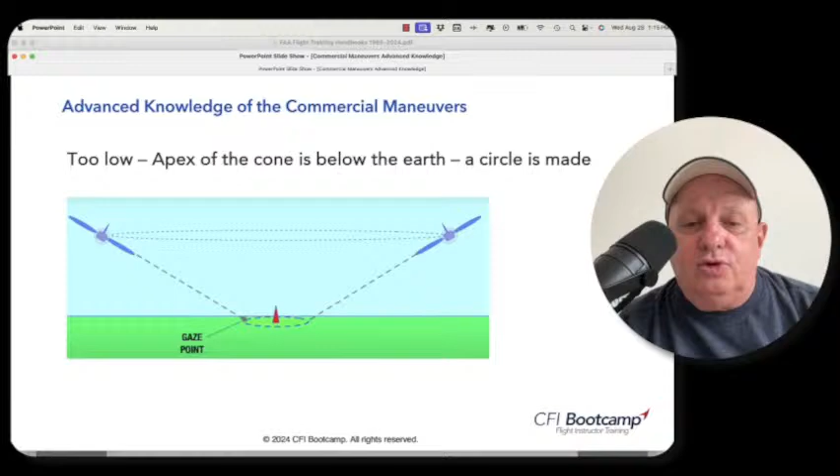And if you're too high, then the apex of the cone goes the other way, and your gaze point is going to be on the other side of the pylon. In one of the directions, it's going to look like the wing is moving forward across the pylon, or around the pylon in a circle, and in the other one, it'll look like the wing is dragging behind it. It'll look like it's making a circle behind.

Now, you can do this for fun. I recommend that you do it. Go out, and you know what the pivotal altitude is. It's the ground speed squared over 11.3, in knots. We can talk all day about why that's true. I have the mathematics done for that, but that's a separate conversation. I've already done a power hour on that, by the way.

The idea here is that for this altitude, if you go out and you look at your AGL height, whatever that is, and you add the pivotal altitude height to it plus a little bit, you'll be above pivotal altitude. And when you start a turn, you pick a point, drop your line of sight, pick a point on the ground, and what's going to happen is as you make that turn, it's going to look like the wing or your line of sight is starting to move backwards across the ground in a circle around that point. It will not stay on the point, but it will make it look like the ground is moving, or your wing is moving backwards across the ground.

And if you continue to descend, all of a sudden it will stop. That's where the pivotal altitude is. And if you go below pivotal altitude, it'll look like the wing is going forward across the ground, not backwards anymore. And that's when you're too low. So in those cases, you would make the corrections, which if you're too high, you'd of course pitch down, and if you're too low, then you'd pitch up.

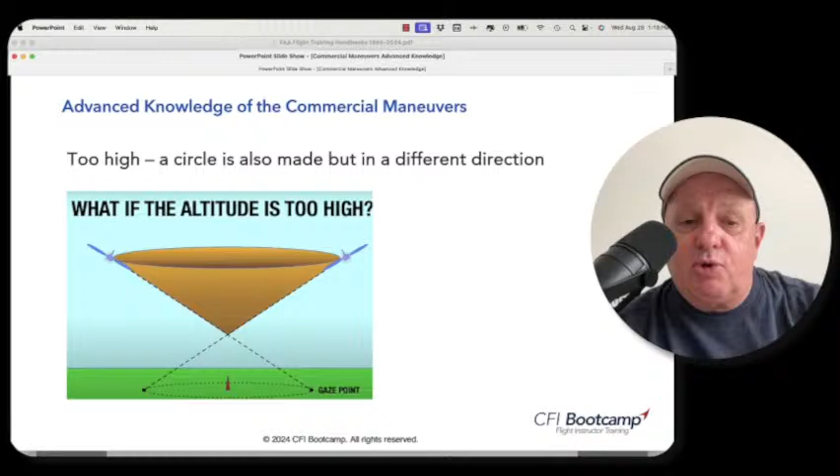If you could envision this, airplane 1 is right where this airplane is, and airplane 2 is below it. It would still be at the correct pivotal altitude if it were sliding down this cone and making a new radius. If it keeps the same radius, then it's too high, or too low.

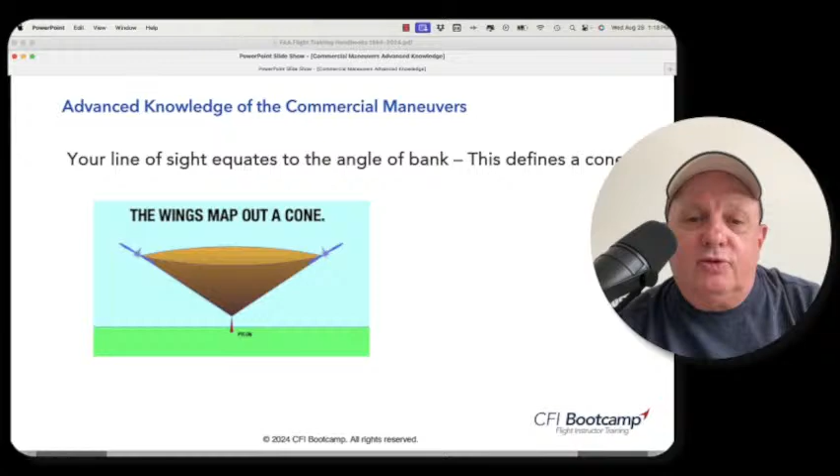But if you slide down this cone, anywhere on the cone, and go around it at the right speed, the apex of the cone will be on the ground, right? So it will pivot again. As you go slower, you have to lower the pivotal altitude to remain on that cone. That's kind of an important concept.

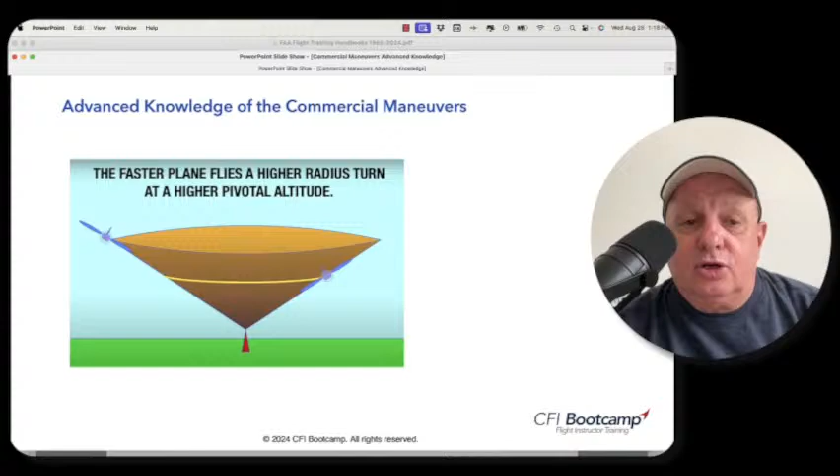So there's the example of that. The first airplane is flying faster, so it's got a higher radius at the top of the cone. If there were a faster airplane yet, it would make a bigger radius, and the cone would just be extended. And there's a slower one. So that's how it works.

Here's the pivotal altitude formula: it's ground speed squared over 11.3. It is only necessary, however, to calculate the highest pivotal altitude - you don't need the lowest. Why not the lowest too?

People will say I teach it wrong. If you hear instructors who fly on opinion, who don't really consult the handbooks, they just fly on what they were told, and then have epiphanies about things - I have a unique way of explaining this or that - a lot of it's wrong. It's just dead wrong. Not all the time, but in many times.

One instructor will say you will fly from the highest pivotal altitude you calculate, which is going to be the ground speed - your true speed plus the tailwind you'll have when downwind. But you will not need to fly all the way down to where your true speed and the headwind make the speed slowest. That altitude you will not get to. You didn't know that, did you? Okay, let me take some of those.

So I just finished 3 miles out in the hot sun here in Miami Beach, and I go down to the beach almost every day for exercise.

Okay, so look, here's the pivotal altitude example. 90 knots is the true speed, and we have a 20-knot wind. So on the downwind, we're going to have 110 knots ground speed, which works out to a pivotal altitude of 1,071 feet. We're definitely going to have to start there.

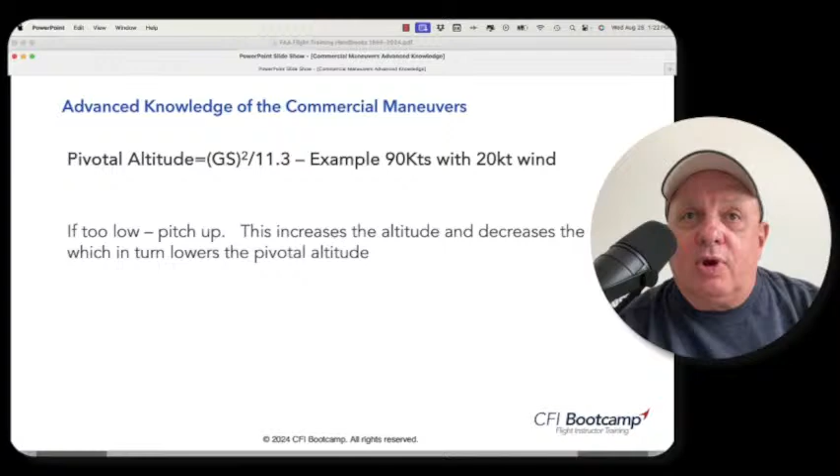Okay, let's move down the list. If you're too low, you pitch up. That's going to increase the altitude, which is what you want because you're too low. But the indicated airspeed is going to go down, which is going to lower pivotal altitude. So the doubling effect works on that. You're not going to have to fly all the way down to where you'd have a 70 knot groundspeed because you're going to let the airspeed vary. That's why. It's referred to as a doubling effect, and it's also the reason that only small changes in altitude need to be made.

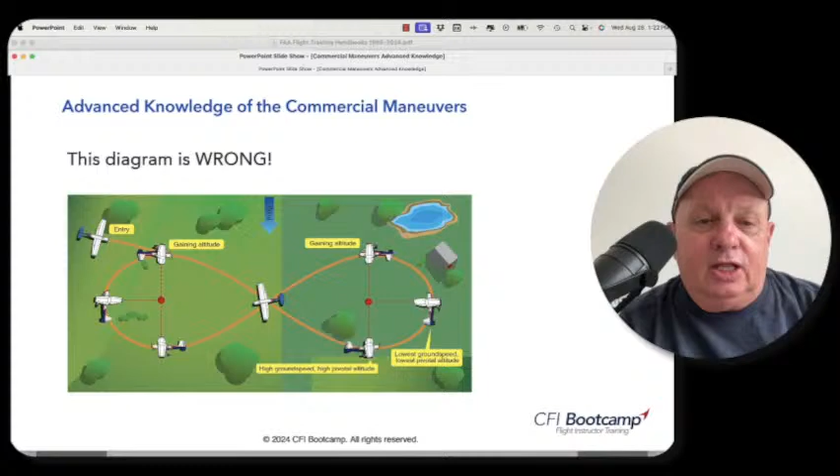All right, so this is a diagram for eights on pylons, and it's wrong, right? Dead wrong. It's not right. It looks kind of like this, but let's look at what's wrong with it. The first thing is the angles between the pylons are too shallow. This is about a 20, maybe 25-degree angle between pylons. That's too shallow. It'd take you a long time to get around the pylons, and the time in between would be very long. That angle needs to be about 45 degrees, somewhere around that.

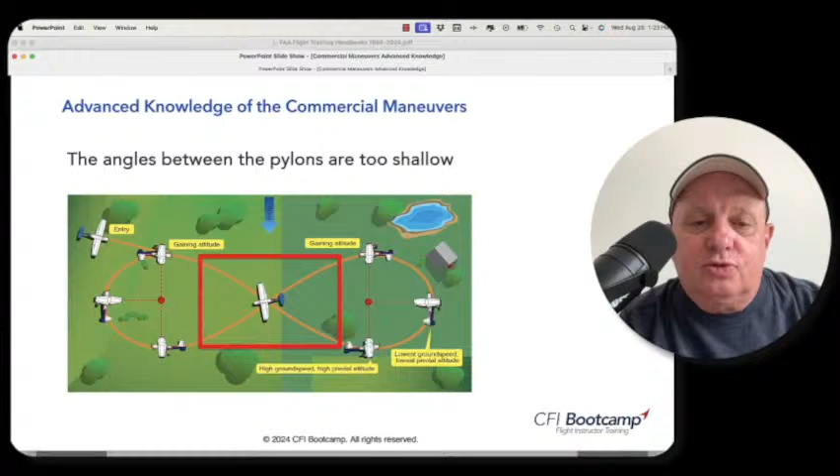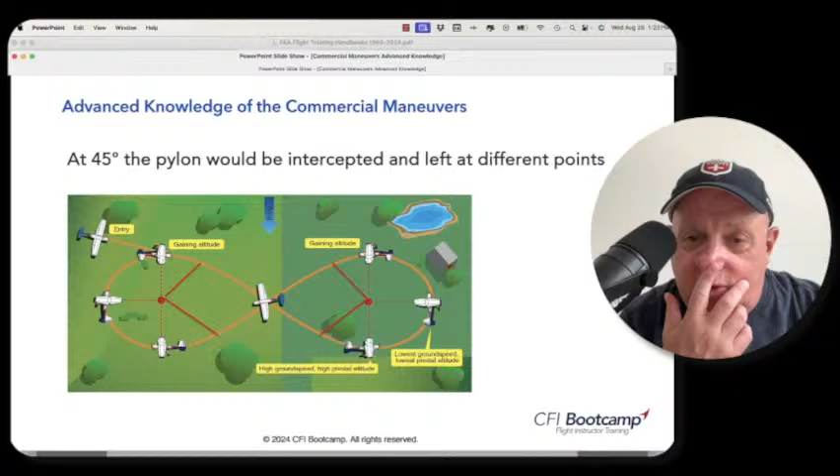The pylons need to be spaced a lot closer than that. In addition, here's the other thing that happens. If you're doing this maneuver right, you're going to start being on the pylon. The wing, line of sight, will be on the pylon right where my new red line is, not there. That's too late. And you're going to leave the pylon about here. That's a big bunch of space going around this pylon that's not being counted for. So if you had to go from here and then all the way down to here, it says 3 to 5 seconds. I think that'd take like 55 seconds. It'd take too long. So that's not right. So this, where I have the red lines, is where it's correct.

So there's that. Also, the pattern across the ground is not correct. It shows a constant radius, pretty much. Maybe it does, maybe I'm a little wrong there. But actually, it's not going to be a constant radius because you cannot correct for wind during eights on pylons, except in between the pylons. While you're turning, you can't correct for wind. If you do, you're not doing eights on pylons anymore. You're doing turns around a point.

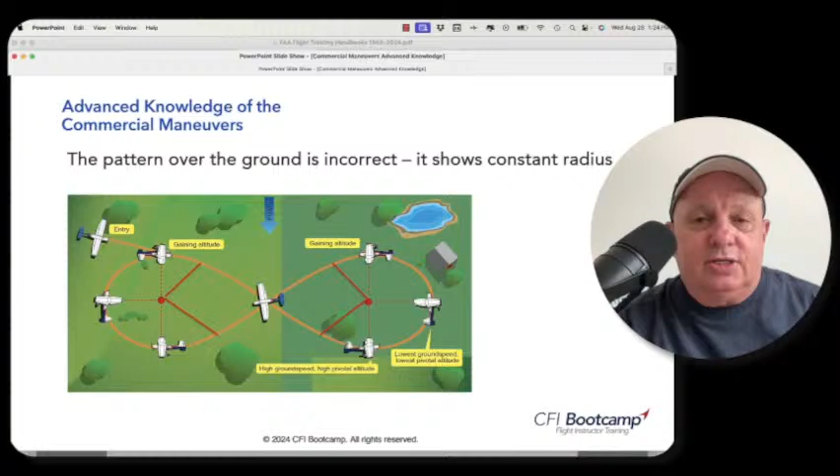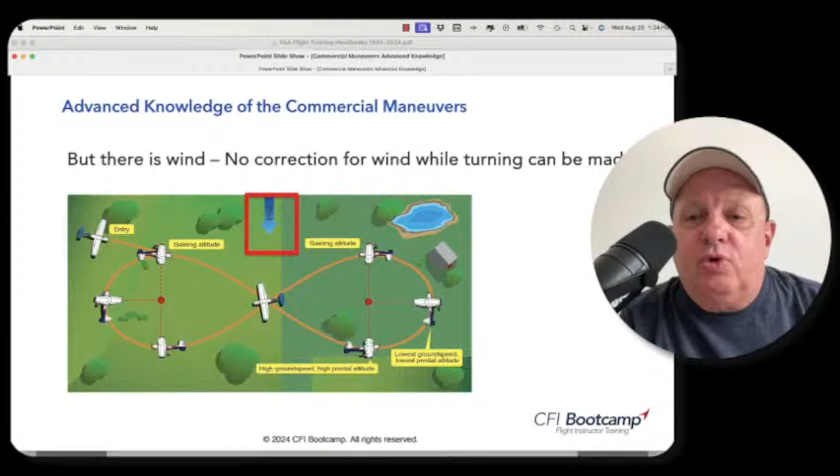And then, of course, you should know that your line of sight is going to change. So if you try to crab by banking more to keep the radius the same, your line of sight is going to change. So you're not going to be able to keep the pivotal point pivoting anyway. So you let it drift. That's the whole idea. In this case, they have wind in this diagram, which is why I say it's mostly incorrect. There's no correction for wind made while turning, right? We don't make any corrections for that. If you try to correct for wind, your line of sight will change.

So the real ground track looks something like this. I wrote this after I made these cartoon images, and I found an image from the old flying handbook that says as much. There's some things missing here that we don't talk about anymore, so I'm going to bring those out to you as we go. The ground track's going to look more like that, because if you look at this airplane, it's starting out in the middle. It's going to continue to drift with the wind until we get right where this airplane is, but it would be over where the red line is — farther, right? Abeam, when you're abeam the pylon. I'll show it to you a little bit better here in a second.

That's where you're going to be farthest away from the pylon. And then the other thing not shown is that on the upwind, directly into the wind, you're farthest away from the pylon because you're not drifting anymore, that drift is stopped. Because you're not taking into account for wind, normally you would have a very shallow bank here.

So you could keep the radius the same. But because we're not doing that, and we want to keep the line of sight on the pylon, remember, if we try to crab by banking, the line of sight is going to change. So we don't want that. What we do is make a steep turn at the very top of the pylon. That's our steepest turn, because if it's not steep, we're going to lose the pylon. We're going to fly over it, or lose our line of sight to it.

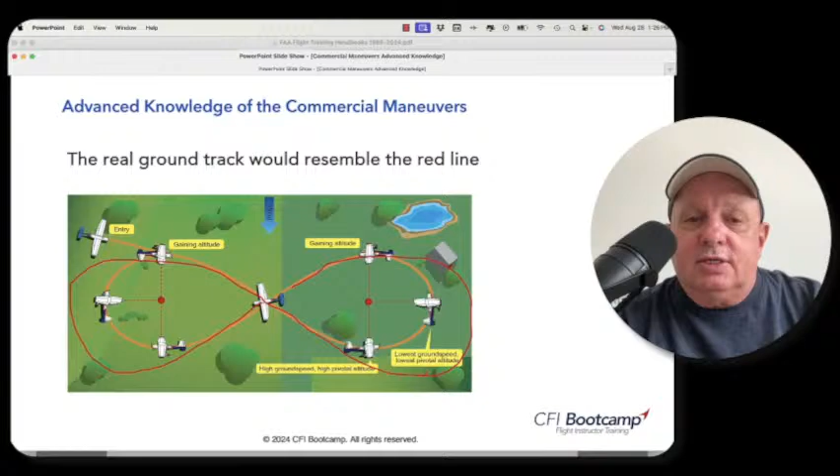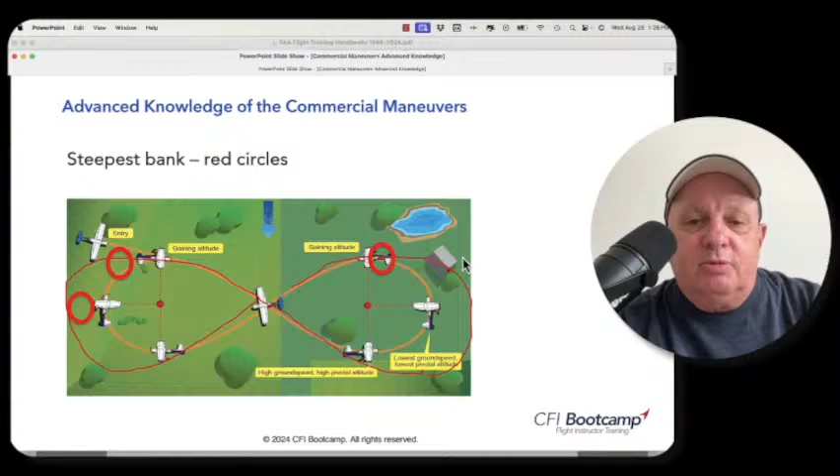You're farthest from the pylon when you're no longer drifting, which is where these red circles are. And your steepest bank is going to be at the top. I don't know why this other red circle persisted, but here at the top, that's the steepest bank. Because no correction for drift is done while turning, a steep turn is required to not get blown across the pylon when you're basically on the crosswind.

Here's that old image from the 1965 Flight Training Handbook, and it says as much. It tells you the steepest bank will be here, and you'll be farthest away from the pylon here. This one is a little better represented as to how it looks. I'd like to exaggerate it a bit, but it's better than the other one. You can see it exiting the pylon, not here, but over here. The entry is still a little bit wrong, it depends on how much you're crabbing. But anyway, it's showing mostly what I've said.

Okay, that's it for eights on pylons.

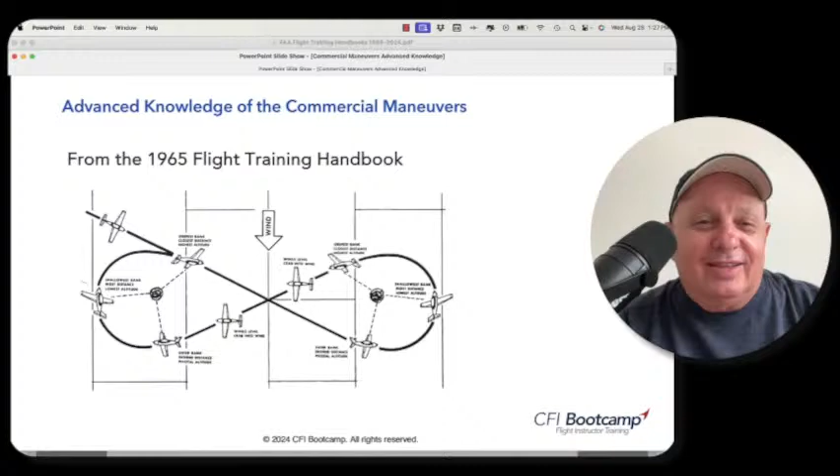How'd you like that? Did that fry your brain? That'll blow your damn mind, they say in the South. Right? Damn, that'll blow your damn mind. All right, there's that. We're going to look at steep spirals. Steep spirals is an interesting maneuver. They say in the South, that's interesting as hell.

So steep spirals is a maneuver that's been around for a long time. If you really want to know how to do most of these maneuvers right, there's a few errors, well, more than a few, but in the 1965 Flight Training Handbook, you can find it pretty easily, PDF version.

The steep spiral was originally designed to train vertigo out of you. How'd you like that? Didn't know that, did you? Maybe if you listen to other power hours. It was designed to be more than 10 turns, because they basically said in 3 or 4 or 5 turns, people don't get vertigo. But after about 10, they start getting it. And so if we can train this out of them, then we have some advantage here.

So the first thing was not to worry about a point on the ground or whatever, it was just to do 10, 13, 15 turns and roll out on the heading and see how it all went. Like, whew, I got light in the head, right?

Okay, then the other was the speed. The speed was done, are you ready? Not at best glide. It was done at 1.3 to 1.4 VSO. Why? Because you're going to be banking.

Now, some people say there's no load factor as long as you're not maintaining level flight, and they're wrong. That's only somewhat true. It's only true if you let the airspeed continue to increase. If the airspeed's continuing to increase, you're lowering the pitch attitude, you're right, there's no load factor. But if you're stopping the descent by controlling the airspeed, you're going to have load factor. It's not going to be as much as level for sure, but it's going to be something. So the steeper the bank and the more you control the speed, the more of it you're going to have.

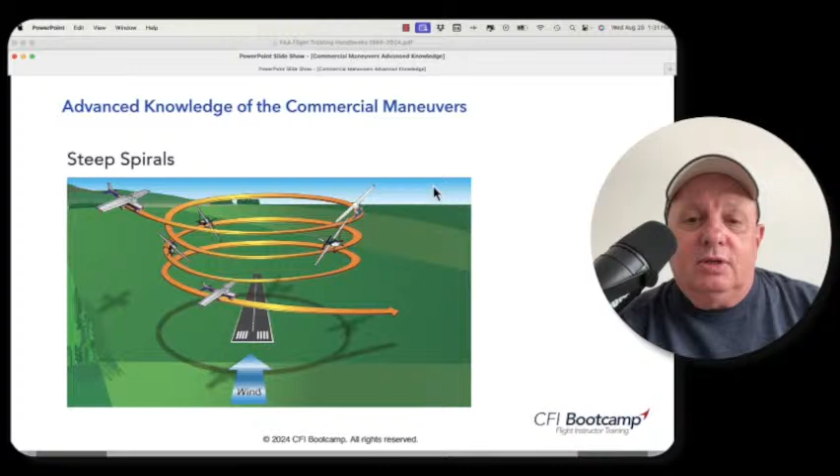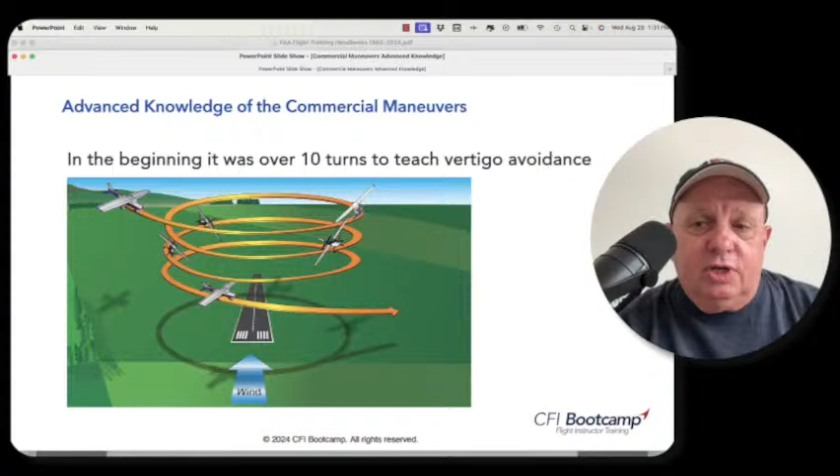Now let's step through it here a little bit so we can cover more. Some information is lost, not mentioned anymore, that I'm going to cover here. So we talked about this. In the beginning, it was over 10 turns. After no vertigo, we said the ground reference maneuver is introduced. Also, the maneuver started upwind. So we said that.

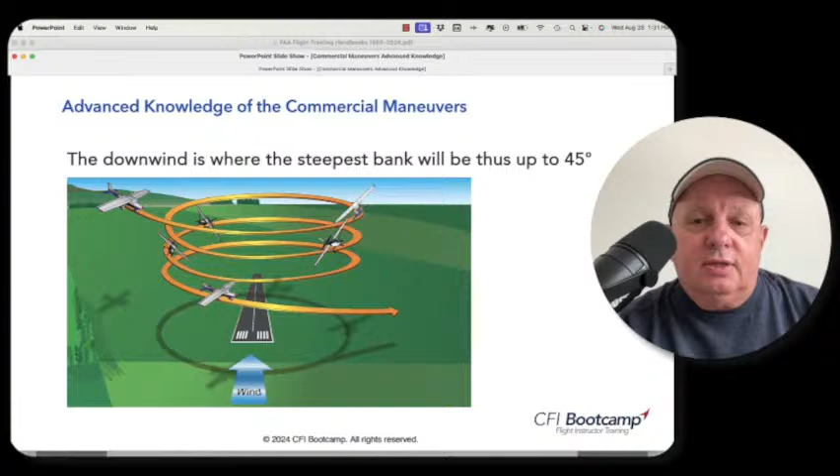And we can use bank angles up to 45 degrees in the steep spiral. That's because it was supposed to be landed from, so you should be on a straight-in to a runway when you're finished with it. Okay, that's what that's for.

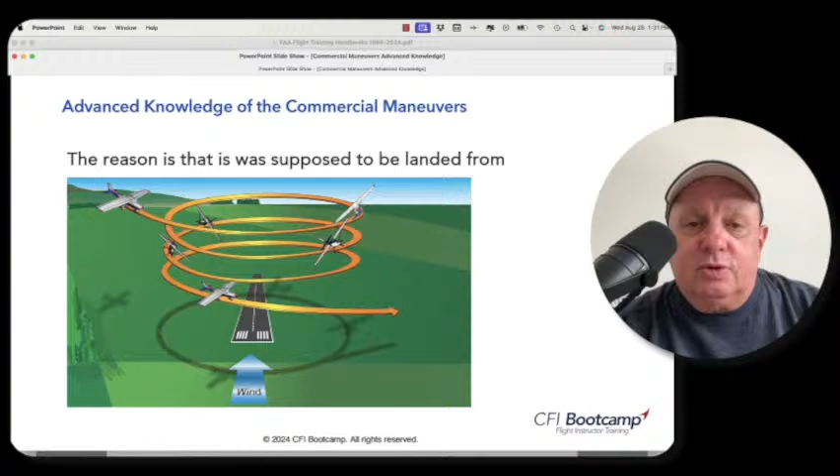Now, airspeed is the first parameter to go out of standard in this maneuver. If you're going to do this, you'll find the ground reference is one thing you can play around with, but the airspeed will go in a heartbeat. And that's because as the bank angle varies, the pitch attitude needs to vary, right? So why is that? It's not talked about. They just make that statement like, oh, it's a great statement. Can we talk a little bit about why?

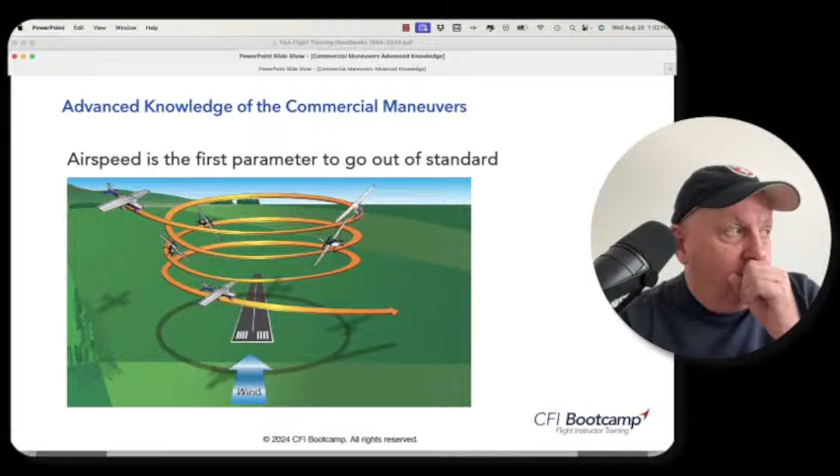So we will. Originally the speed was 1.3 to 1.4 VSO for accelerated stall avoidance. Now we use a glide speed, usually best glide. So as the bank angle increases, airspeed is lost due to induced drag. When you increase the bank angle, you have more induced drag and the airspeed is going to lower, so you have to lower the nose to maintain the same airspeed.

And consequently, as the bank decreases, the airspeed increases, so you have to raise the nose. So that's lost. That's in the Airplane Flying Handbook two times ago, so not the B model, but the A model. And it's in other places as well, but it's not in our current one.

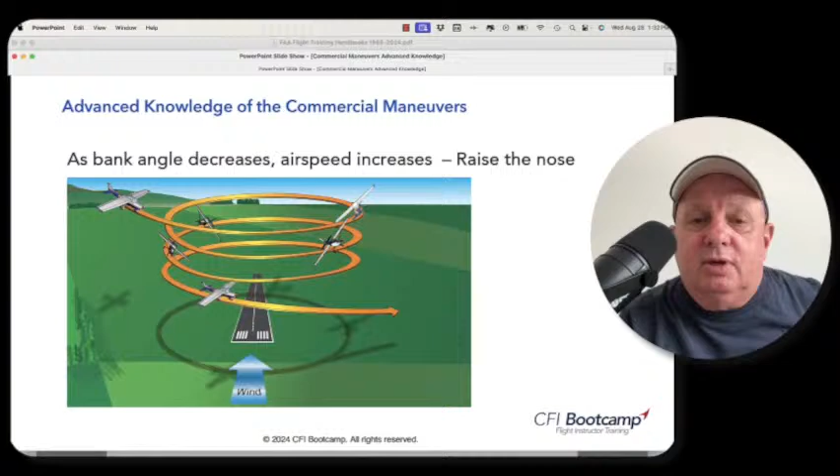Now, why? Don't ask me, I don't know. Now, the point that you're spiraling over, depending on your altitude, but usually you have to do this at a pretty high altitude. You've got to finish it by 1,500 AGL, so typically 4,000 or so feet, 5,000 feet. You're doing 3 turns in this maneuver, at least 3 turns, it says, and you lose quite a bit of altitude.

If you pick a pylon that looks to be like out half a wing strut, that's a lot of miles, so you're not ever going to get a steep spiral around that because that's a lot of ground. But as you get closer to the ground, the ground magnifies and you'd see it then. So you need to pick a point that's basically almost between the tire, if it's a 172, and the fuselage. Right in there is about where it's at, or on the tire, very close to that. That's what it has to be in order to get this to work out.

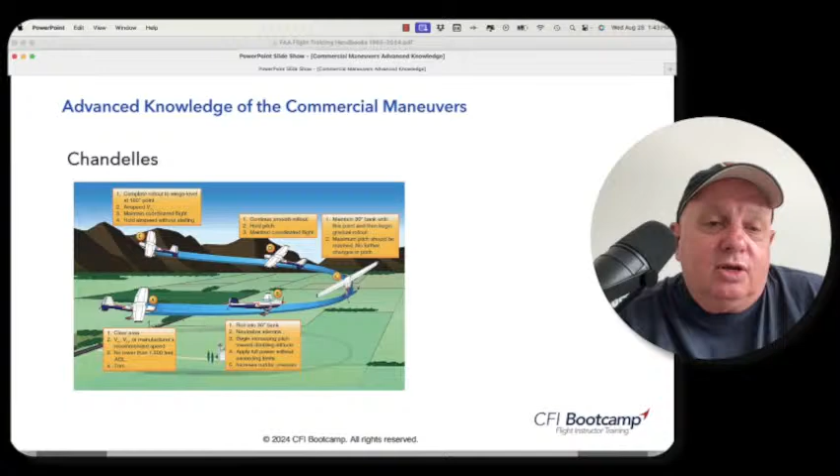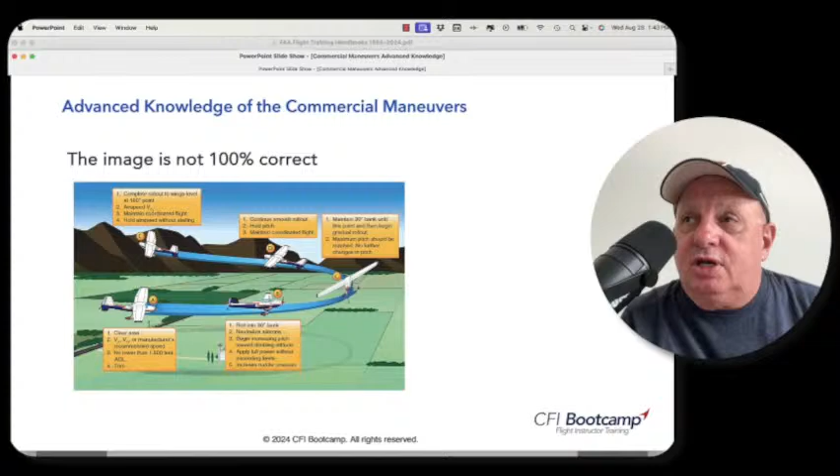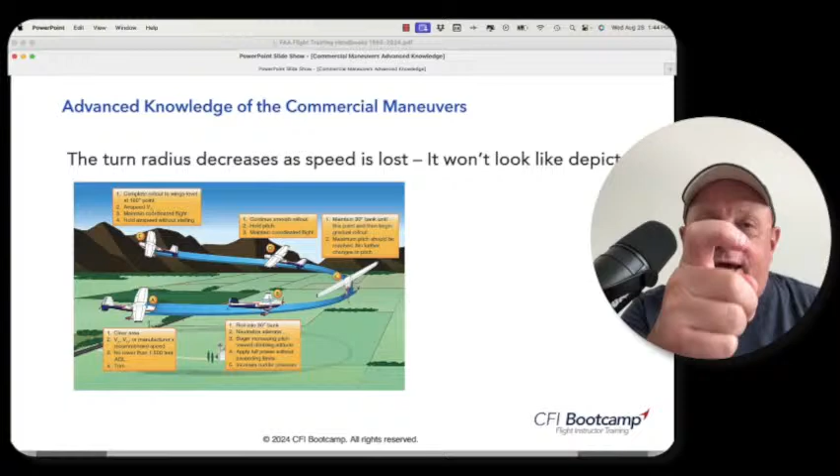There are things here that aren't printed anywhere. This image isn't correct—what's wrong with it? We're back to the idea that the symmetry of the image is what's wrong. It's not a constant radius like that, because the speed is changing. The turn radius decreases as speed is lost, so it won't look like this. When you get to C, when you start turning, that radius continues to shrink. It's going to look like one of those—like you hang a bulb on a Christmas tree, that hook shape. It starts off, comes around, and gets tighter and tighter. You can bend it in tighter, so it'll look more like that.

And then what's the pitch attitude at the 90-degree point? I asked people in our CFI class this, and boy, the answers I get—the same dumbfounded answers, which is fine.

You're allowed to, we don't judge you on this. I mean, I'd like to, but I can't, because I was worse than you when I started, right? So you asked me a question. Now I ask the good questions, right? You go like, oh, that's a good question.

So I ask you this question. One is about the chandelle. That's the question. The other is about when you know to descend for landing at an airport.

So here you are, flying along at, pick your altitude, 8,000 feet, 3,000 feet, and it's time. You say, okay, now is when I'm going to start letting down for the airport. I can see the airport. When do I let down? Every CFI I would examine would be able to put their hand on the throttle at the right point and start descending. And I say, now teach me how I would know to descend at that. How would I know that? Teach me, I don't know how to do that. You just did it, I saw you do it. Obviously, teach me when it's the right time.

And boy, no answer comes. No answer comes. Well, I'm going to tell you. Then we'll go into the last two maneuvers here, just so I can not leave you hanging, right?

So if you're flying along and you're far, far away from the airport and you can see the horizon, the airport is over the horizon. That's too soon, right? And if you watch, the airport's going to come to the horizon, it's going to come towards you. And eventually, if you do nothing, it's going to go below you and then behind you. That's too late. So there must be a point that you could measure from the horizon to you that is the right angle. And that angle is when the runway is halfway between your cowling or what you're looking at and the horizon.

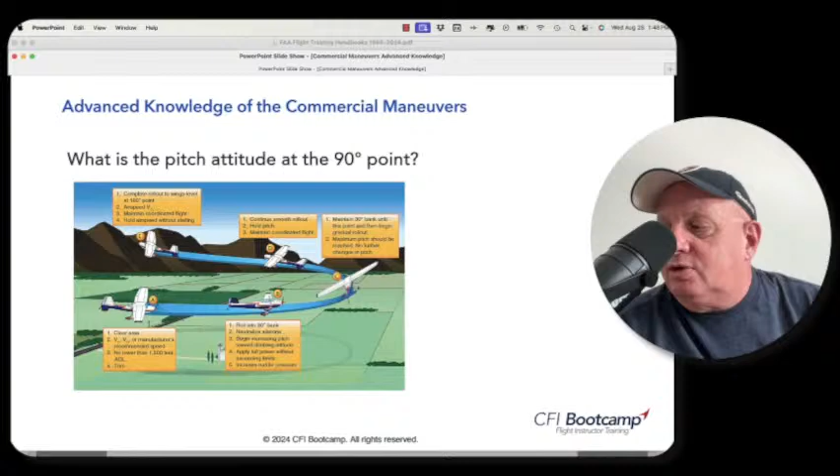You can target that speed. Maybe we start off at 95 knots, and that speed is like 70 in the chandelle. That helps because we noted it from doing one right. We said, that was 70 right there. Now we have a pitch reference for the 90-degree point. So when we get there, we should be 70. If we're at 75, we've got to increase the pitch slightly to get slower by the time we get there, or we've pitched too much and can soften the pitch a little. It's not a cheat or a hack, but a way to refine the maneuver at the 90-degree point.

Okay, so there's that. Moving on, that's what we said. It varies with that. When is right rudder used less in a chandelle, to the right or to the left?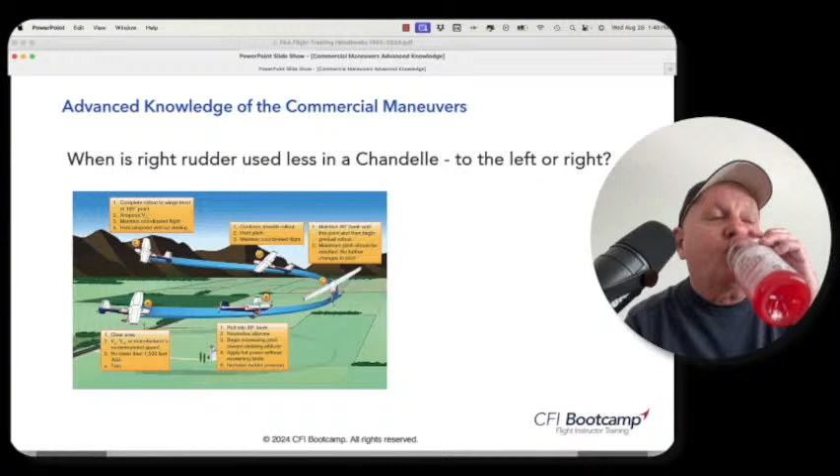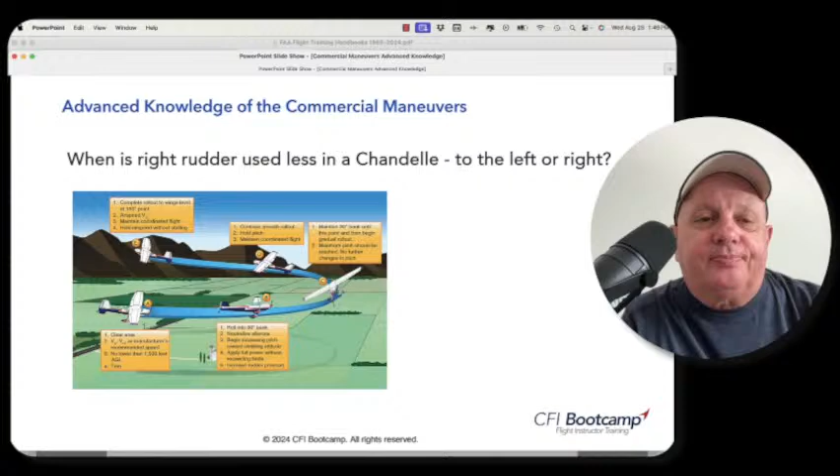This one is interesting. So when would you use less right rudder in a chandelle, to the left or to the right? Now you're going to think it's funny, so let's look at it. To the right during rollout. Why would you use less right rudder when rolling out from a turn to the right?

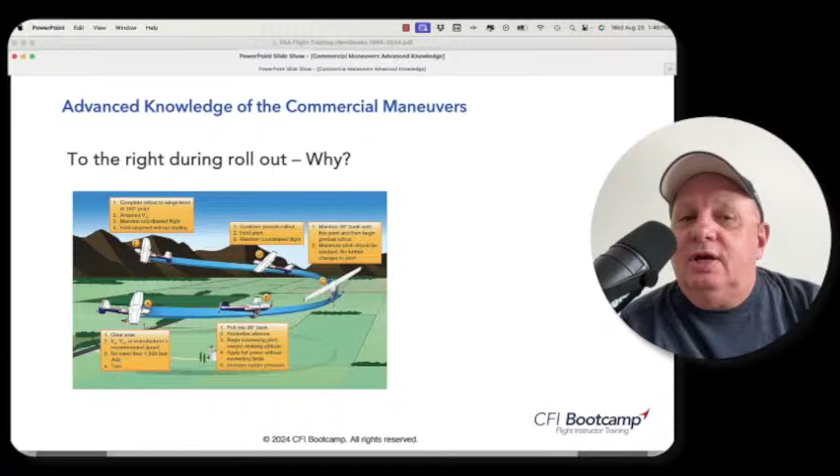That means you're going to be using left aileron to raise the wing, right? Because the left turning tendency pulls you left - you know that already, that's what you have rudder for. But when rolling out of a chandelle to the right, you're using left aileron to raise the wing, and that produces adverse yaw. Adverse yaw slows that wing down, and it actually tends to cancel the effects of the left turning tendencies. So you need less right rudder because you're inducing adverse yaw opposite to the direction of left turning tendencies.

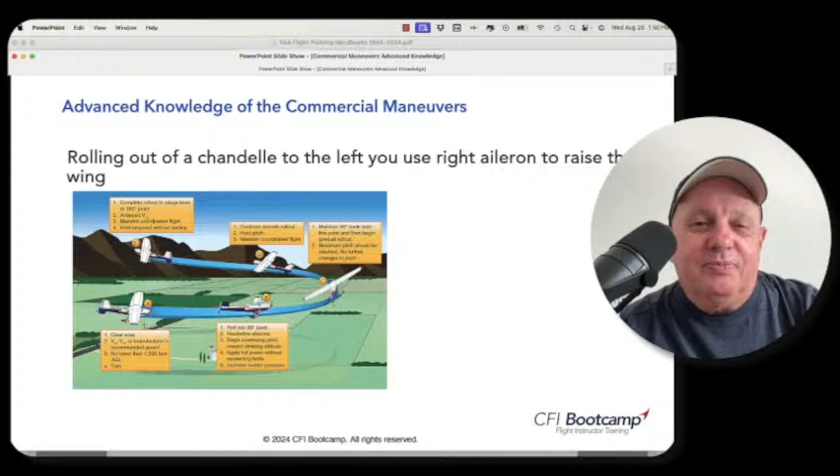Ooh, that just gets you in the head. I know that got me in the head when I first heard it. I'd say, amazing. That's that. This is basically what this is saying. You have a copy of this in the outline, so you're getting a copy of this presentation as a PDF.

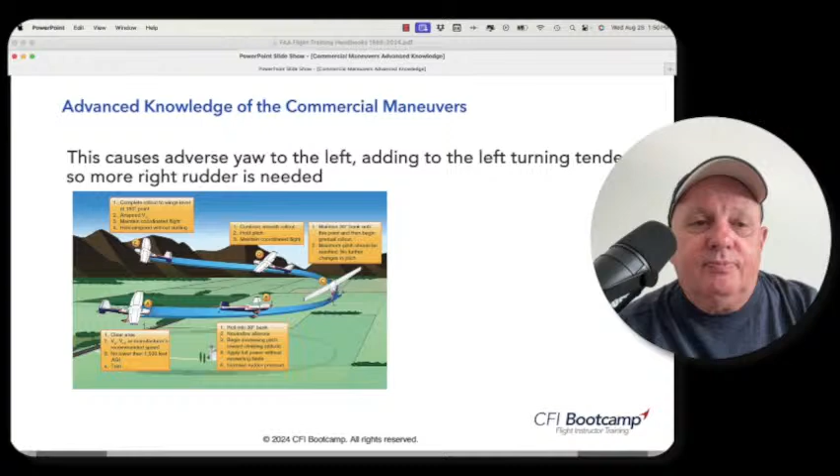Okay, then we're on about the last thing we're going to talk about, which is lazy eights.

So they say in the South, that'll blow your damn mind right there, right? I don't know why I'm on the South thing lately, but I am. We do it in class too, it's never a dull moment in our CFI class. If you've been to them before, you'll know this is not a static class. It's pretty humorous a lot of times, but you have to make it that way. You don't have to, but if you do, people identify with good humor, especially on something highly technical, and then you give it a little break for a second.

That's a good thing. We're also doing things differently - let me tell you why, I've got a few minutes here. I revamped this course, our CFI class, a lot. The first day is spent pretty much using technology all day, getting you up to speed on that, along with some other things. I've also dumbed down the FOI.

So what does that mean? Here's what I've been thinking about. Every other country that makes flight instructors either has no such thing as fundamentals of instructing, or has a smaller version of it. Like Australia and New Zealand have smaller versions of it, and for good reason - the information in the Aviation Instructor's Handbook is too much. It's too difficult to process. Then you question, how am I going to get through it all during a check ride and all this stuff?

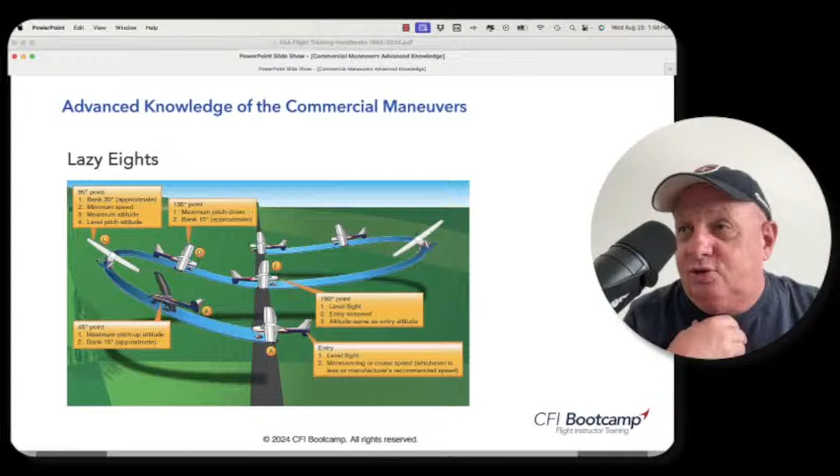I'm going to have Jason on as a guest speaker hopefully, and maybe we'll have a little debate about that. He's a super nice guy — plays guitar. If you don't know him, he's at West Valley Flying Club in San Carlos, California. I've known him a very long time, good guy. But I don't like his video. He probably doesn't like some of the things I've said or sworn either. But there you go. Let's move on.

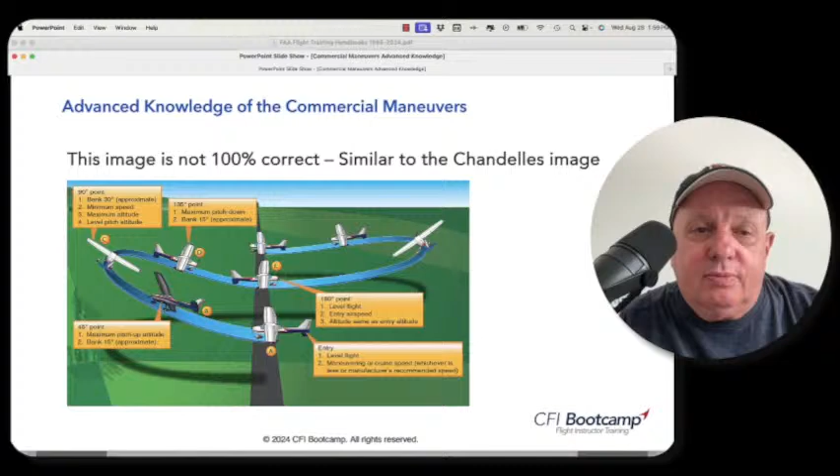This image isn't 100% correct either. It's similar to the Chandelle's image, where the radius of the turn as you go from B to C to D is decreasing. It's going to look more like an egg, the small end of an egg, with the radius decreasing as it gets there — not a circle like that. So as the speed decreases, the radius of turn decreases. That's true, but the image shows the turn radius mostly the same, which isn't right.

This maneuver really resembles a snowboarder in a half pipe. Picture someone going up one side of the pipe — they get slower and slower and come to the top. Because the speed is slow, they can make a very small radius turn and come down. If they had the same speed as when they went in, the turn radius would be huge, and off the pipe they'd come, flying into the air.

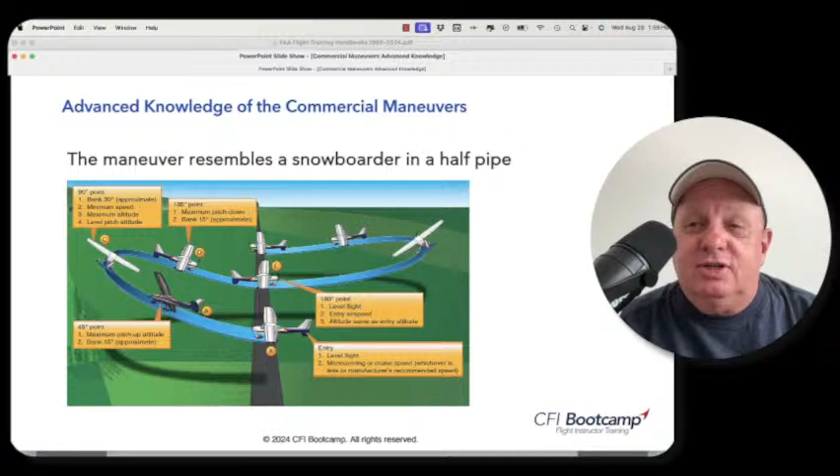I did that on my scooter once. That was not good — I flew at 20 miles an hour. Yeah, I was a pilot, but I must have forgotten my pilot certificate at home because it didn't end well. But the FAA didn't come visit me about the scooter. All right, here you go.

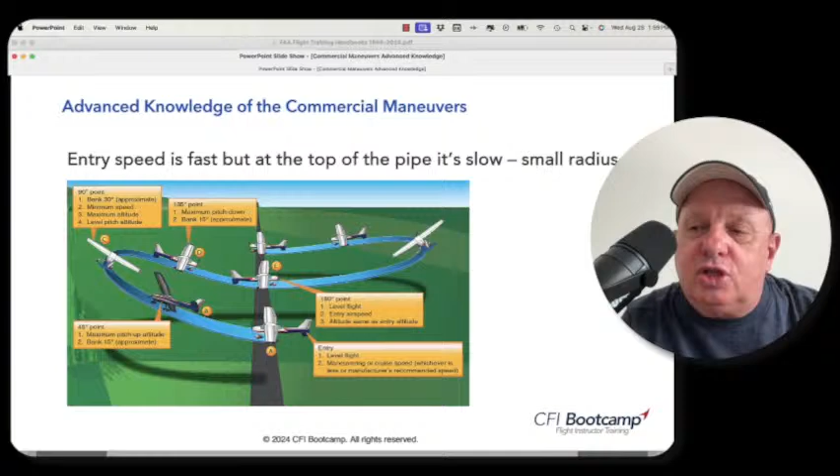The entry speed is fast, but at the top it's slow, so you can make a small radius turn. That's the idea. If you don't get slow enough in this maneuver, it's going to be a challenge — if the speed isn't slow enough at the 90-degree point, the turn will not be completed to 180 degrees.

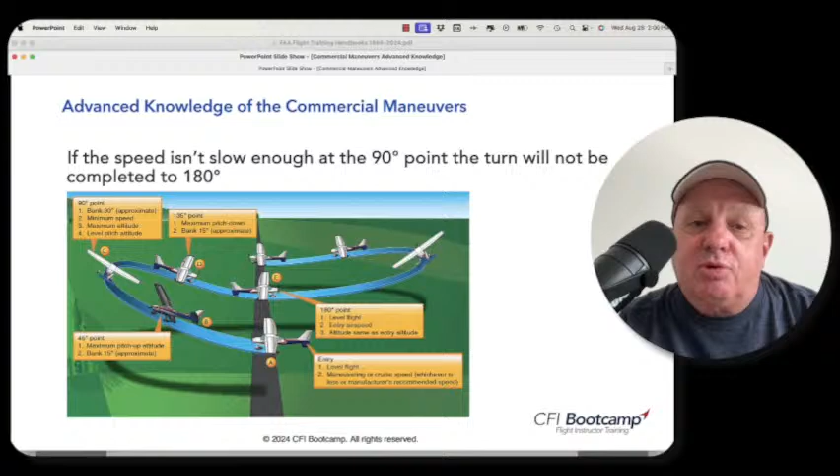You'll be too fast, and the turn radius will be too great. By the time you pitch down, the airplane won't come through the turn. So you have to get slow—5 to 10 knots, preferably 5, right there at point C of this. If you're not getting around the horn in the lazy 8, it's probably because you're not slow enough there.

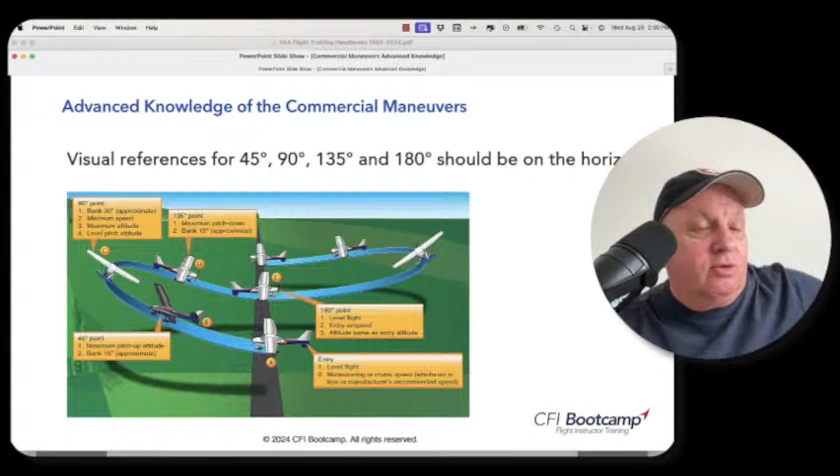You need visual references for the 45, 90-degree point, 135, and 180, and those need to be on the horizon, nothing close. Look way out on the horizon. Here we use downtown Miami, or Fort Lauderdale—that's sort of 45 degrees apart—or a canal way down at the horizon. You want to be able to see those things way out there.

For rudder pressure, this is in the handbook, and it's kind of tricky to understand, but basically in a turn to the right you're going to have an overbanking tendency. That's due in part to the speed being very slow, and second, you're putting in more right rudder to counter the left turning tendencies, so it tends to want to overbank. When you do that, you have to hold a little bit of opposite aileron.

Some people, I don't know if you'd say they're even conscious of that, but you'll do it instinctively. I just look outside, and whatever I need to do is what I do. I don't really notice if I'm pulling or twisting or whatever—I just know it's what I need to do to get the picture to look right. So they say, okay, that's a bit tricky to understand.

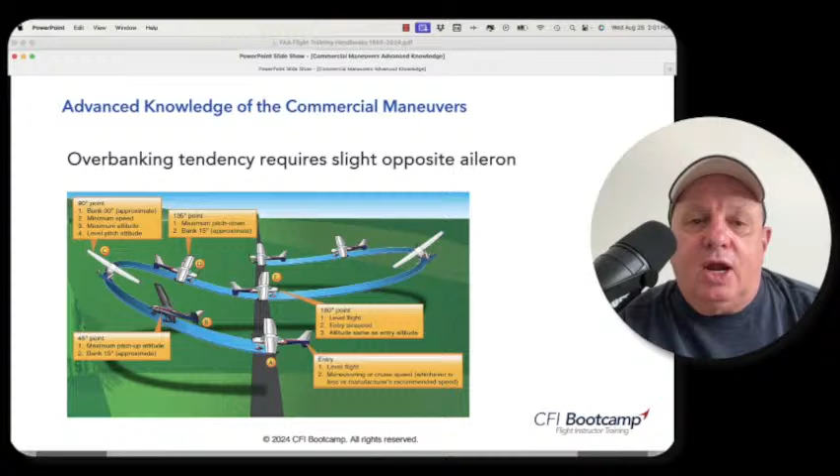So they said you can remember it this way: rolling right at low airspeeds and high power settings requires the most right rudder. That's pretty good for rudder pressure. And overbanking tendency requires slight opposite aileron. So if you're rolling right at lower speeds and high power settings, that's where you're going to use the most right rudder in a lazy 8, and that's in the right turn at point C when you're just coming through the horizon.

By the way, people get that wrong too. In the lazy 8, there's no slicing through the horizon—none of that. You're flying it all the way through. At the 90-degree point, the pitch attitude is level. The airspeed's still decreasing because the nose was slightly above the horizon, and it doesn't increase until it goes below the horizon. That'll be your slowest speed, but you'll be at level pitch. The highest pitch will be at point B at 45 degrees.

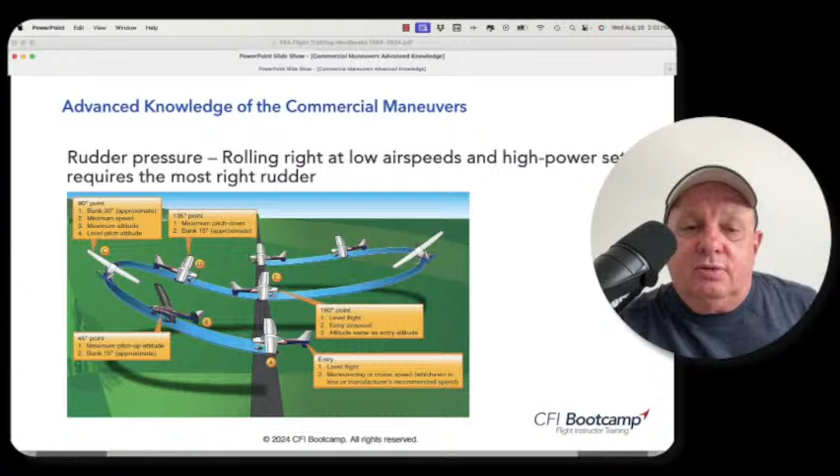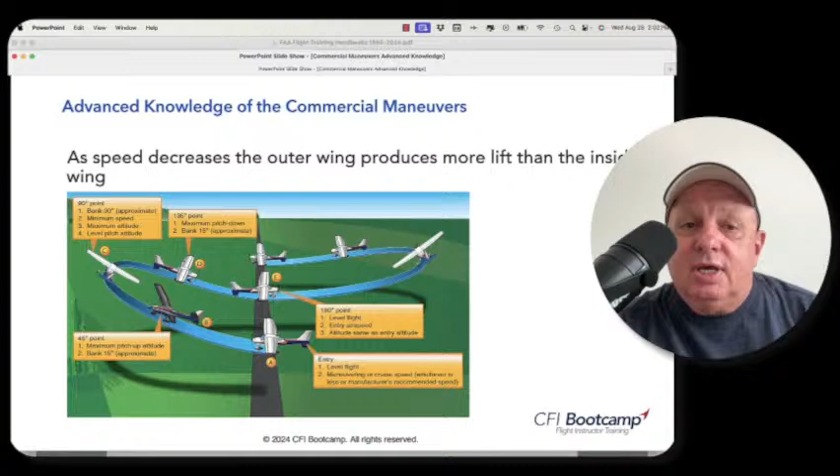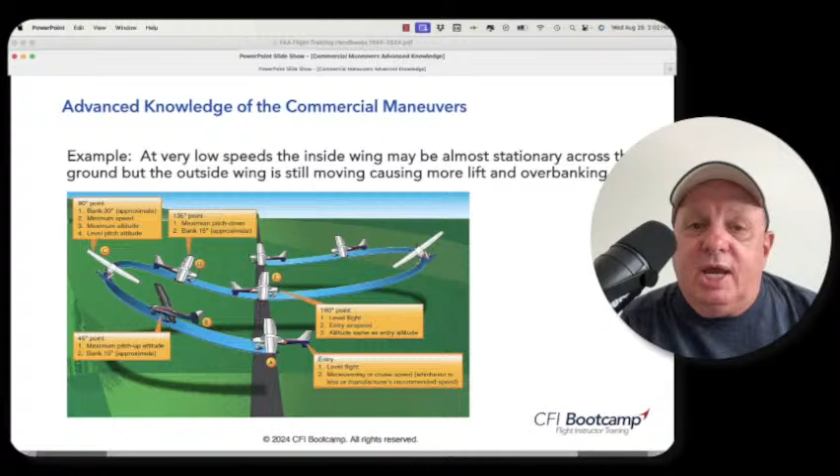So this maneuver is very easy to screw up. Now, as the speed decreases, the outer wing produces more lift than the inside wing—that's interesting at point C. If you have very low speed, the inside wing will look almost stationary across the ground if you can get the speed that slow. But the outside wing is still moving if you're at 30 degrees of bank, causing more lift and overbanking tendency. So at low speeds, the overbanking tendency will tend to be higher. The faster your speed, the less this happens.